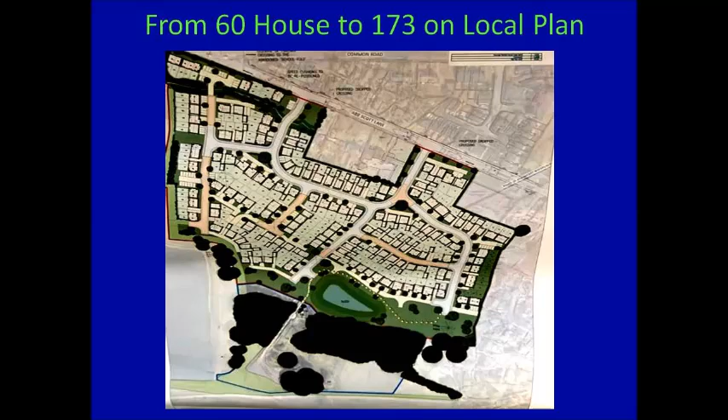Memorialise the objections so that material fact may be scrutinised. To assist local people by describing the working of the planning system. To provide knowledge on how to make an effective planning objection, and in doing so assist in the identification of effective planning policies and valid material concerns on the site, and to guide you to a template that you may wish to use, share, adopt or submit.

We'll try to answer some of the questions raised at the meeting of the 9th of September 2024, which we've appended to the end of the presentation.

In the process of doing so, we'll walk you literally through the planning site, showing you video capture of some of the issues relevant. As the scope of this material is enormous, you may wish to watch this video in two halves. You may stop the video at any time to read any text or map.

Planning can be a tedious process, and we have tried to make the material as interesting as we can and suitable to all levels. So let's get the more dry material out of the way before we move to the issues of flooding and the dam, so bear with us.

So, what makes a good planning objection? It should set out any reasons for extension, such as the absence of any statutory consultee or delay in the response, because you cannot make an objection to an application if it's prejudiced in the absence of information. Having set out a request for extension, most importantly, it should be in two parts.

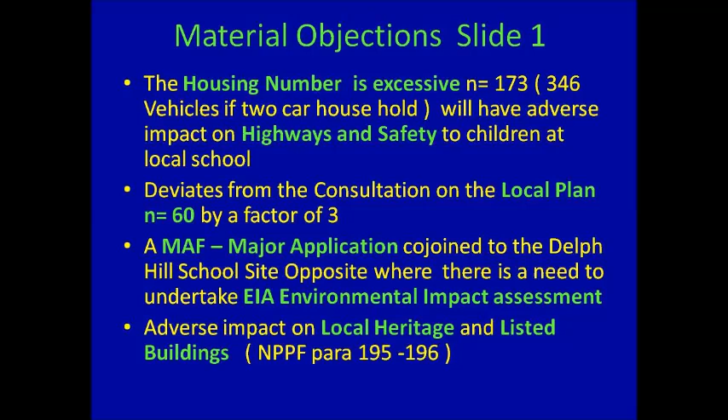We are now going to turn our attention to the major robust issues, beginning with mines, and in particular ground stability to the front of the dam, contamination and mine gas. We will also be looking at flood issues in relation to the linked and connected matter of proximity to the dam...

...and the 2 large raised reservoirs of high capacity, sustainable drainage and local flooding. We'll also identify the HSE zone, placing restrictions on housing numbers due to the dangerous industrial activity, and we'll also go into detail on the template objection BNL, which is biodiversity net loss as a result of the development.

We are now going to look at issues of mines on site, the direction of which is set by the statutory consultee, the Coal Authority. The principal concerns are ground stability, contamination and mine gas. And in particular, ground stability, given the proximity of mines to the frontage of the dam and any permeation of water through the subsoils which might cause instability at a future date.

The fields facing the collecting basin, particularly in the southern proximity, will inevitably have some form of seasonal subterranean seepage across the ground layer, which when considered with the very close proximity of mines is a factor which I cannot see has been taken into consideration, particularly in mines which are grouted and plugged.

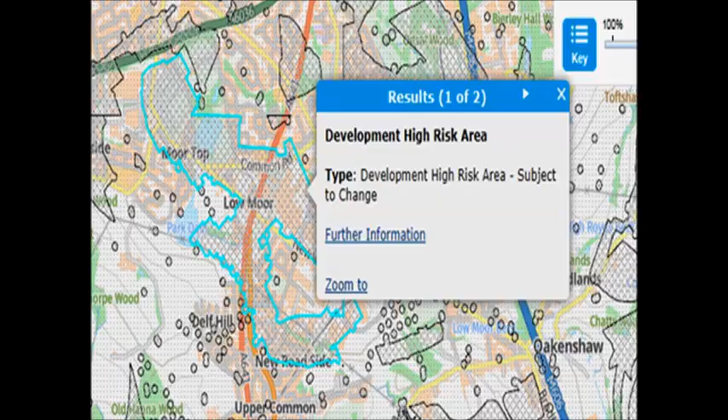So let's have a look at the Coal Authority maps, which many people will have not seen, and you can make your own mind up. The maps aren't at a particularly high resolution, so I've taken the liberty to blow them up a little so they're clear. From these maps we can see that the area is close to or within an area of high risk and unsuitable for development.

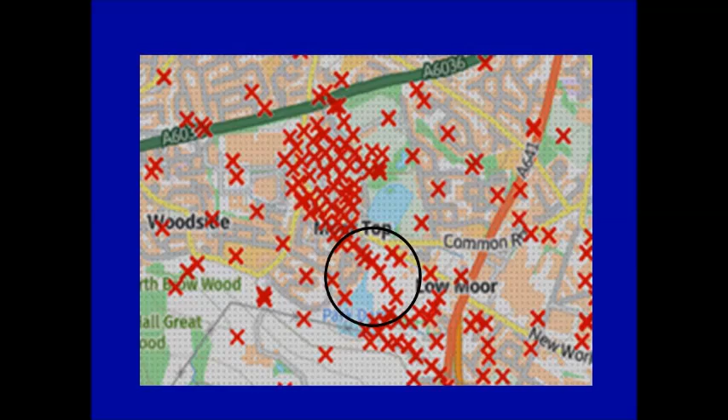We can also see the presence of mine shafts on the site with entry and the potential zone of influence of those shafts on the site. Developers will seek to remediate these mine shafts by grouting or plugging them, and on the issues of mine gas they will put membranes to exclude. However, developers often can't mitigate the unpredictable effects of ground stability.

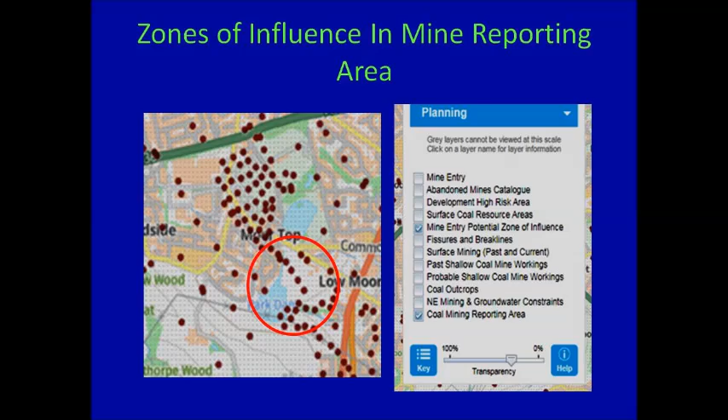We turn now to the required statutory consultee, the Health and Safety Executive, where the site is located within the middle zone of a dangerous industrial manufacturing area, namely Solenis and one other. The comment from the HSE on the Regulation 18 Preferred Sites consultation is to limit the housing number to 40. This number has already been exceeded in the Delph Hill Middle School development on the site opposite.

As per the meeting of the 9th of September 24, we have taken the liberty to contact the HSE to see if these zones of influence have changed as a result of manufacturing. Likewise, it is unclear how the developer will justify 173N houses when the preferred site consultation limited or restricted the numbers to 40.

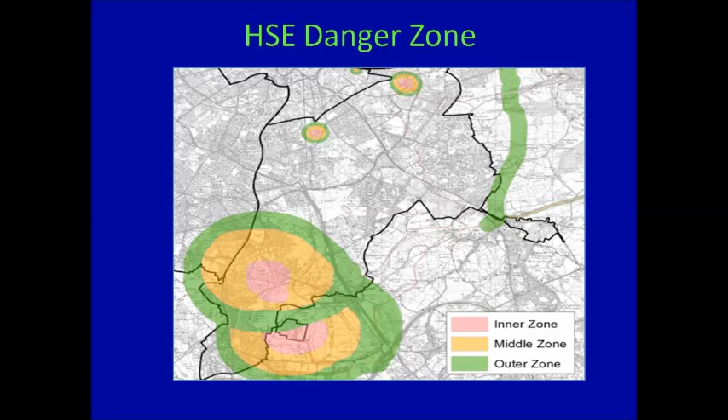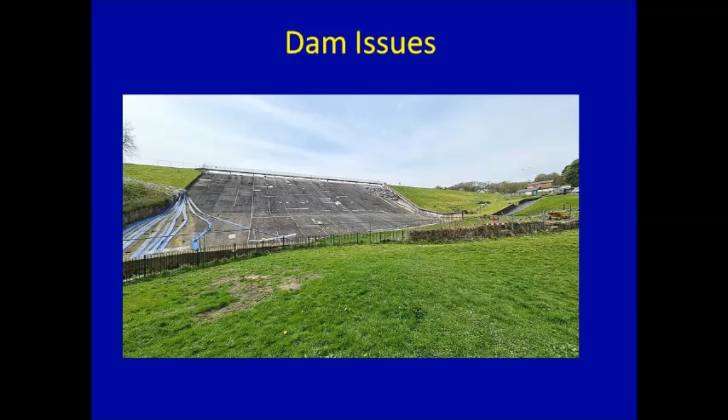We are now going to take an in-depth view to the maintenance of Park Dam and its watercourses, as it bounds the site on all four sides. We examine it in the context of flooding, drainage, and the implications of riparian rights on the watercourses located on it. We believe we have done this with due diligence in the light of the Toddbrook Dam incident.

Where we make reference to the dam and its watercourses, we do so in respect of the compass at the midpoint on the development site. So let's start at the beginning, where the water comes in.

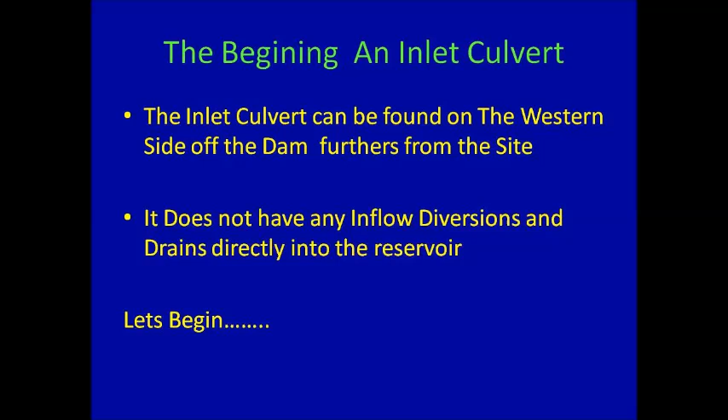Okay, so it's 13th Friday in September and we're back at the Park Dam. Today we're going to have a little look at the inlet, which is just down there. Hopefully the camera doesn't go into the water. So we just put the camera down. You can see we're actually directly looking into the inlet that feeds Park Dam.

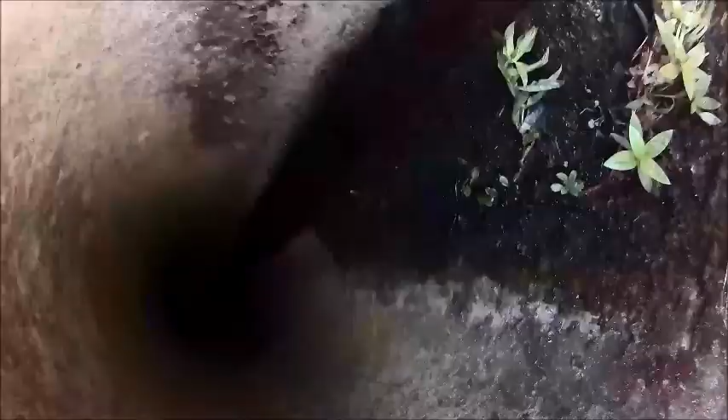There we go, bird's eye view. You can even hear the echo. So that culvert runs all the way over to Brow Woods, just at the side of Fenwick Drive, and this tops up and fills the dam. There is no inlet diversion should you want to stop it coming in here.

As we look up in the distance, we're going to go to the other side of the dam to look at the two outlet channels, the one in the south, which is on the Delph Hill side, and the one in the north, which is on the Cambria Bar side, and we'll be looking at the outflow. So the purpose of the visit today is to look at the inflow into the dam, the outflow, the integrity of the dam wall, and then to go forward and look at the potential breach point in the corner where the north part of the reservoir turns into a channel mouth.

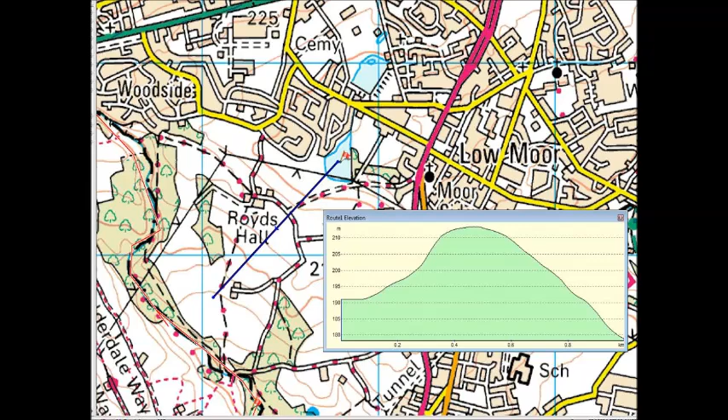Park Dam can be seen here on the 1854 Ordnance Survey map. Park Dam is an impounding dam, meaning it catches water and drainage from the surrounding hill slope hydrology from the 225 contour line. Here on the 1897 Moor map, we can get a brief insight into how the dam was terraced and constructed as a collecting basin.

As we move across the reservoir to the side closest to the development site at Abb Scott Lane, we can immediately see it has two channels. A channel to the north, which is a runoff channel, and a channel to the south, which is the dam spillway channel moving through Park Bottom Wood. Before we commence our journey around the watercourses, that being very important in the context of the Moor Act and the restrictions on the development site, we take a very close look at the anatomy of the dam.

Park dam is an impounding dam, meaning it collects runoff and drainage from the surrounding hill slopes, as opposed to a non-impounding dam, which is normally filled with pumps and other means.

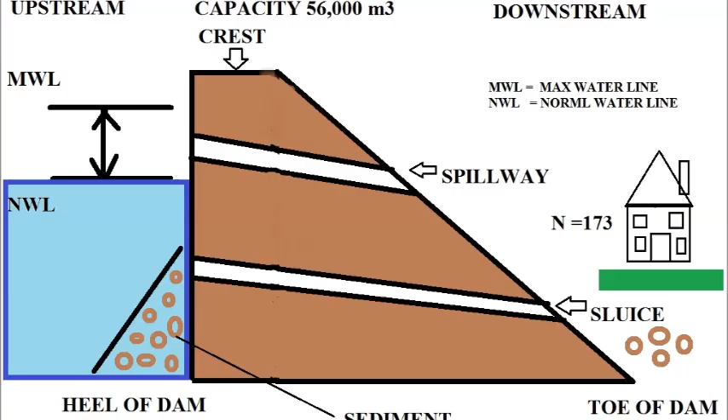As a community, we cannot overemphasize the immense value that the reservoir and open space in its current form brings to our area and community, and reflect the dam's role in preventing the Allied Colloids fire in 1992, where the links are in description, and which we also reflect in our health and safety zone objection on proximity. Perhaps the moral of the tale is to leave well alone.

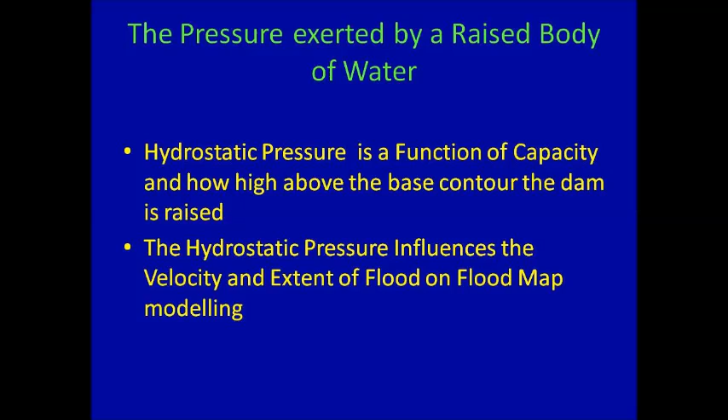Is coming out on the base. We can see that's influenced by the hydrostatic pressure. If you upturn it, you can see how different the water is as it comes out.

And obviously, as you raise it higher, the jet will reach further. So we turn it back up the other way, and we can see clearly as the hydrostatic pressure goes off towards the hull, the amount of water

at its distance reduces. The main purpose of this demonstration is to demonstrate what hydrostatic pressure is. The hydrostatic pressure, the forces on this wall, are very much down to the capacity of the dam, and the current estimated capacity of Park Dam is in and around the 56,000 cubic metres.

So that wasn't a very good demonstration, but I'm simply illustrating that on this dam there is a tremendous amount of force on the walls, and we have to ensure that no overspill occurs.

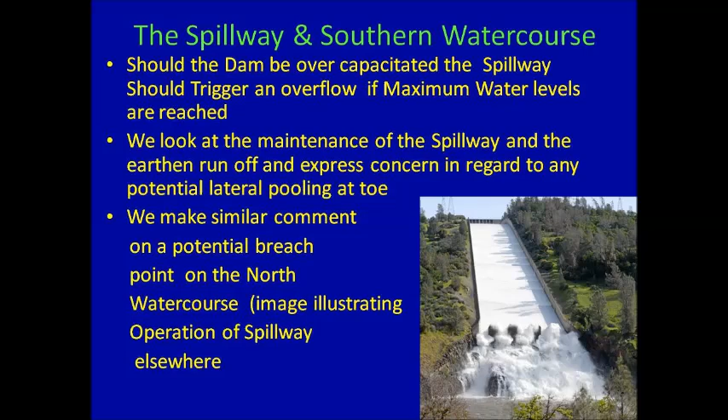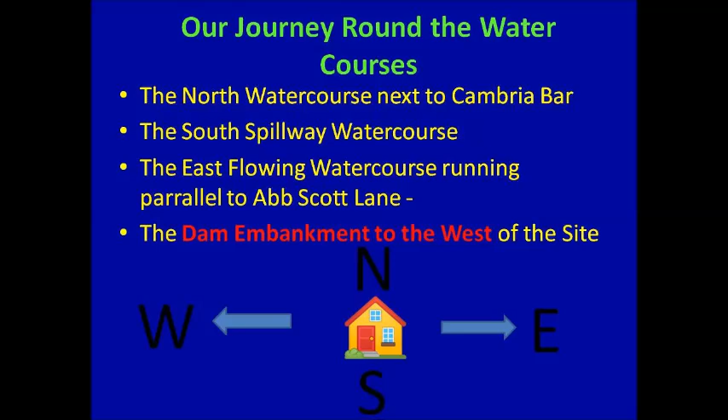My lay assessment and observations are that the spillway modification never adjoined the watercourse reaching the mineral track bridge, as it was always intended that that watercourse was for the use of sluice activity. Therefore, the potential for the spillway section to pool and undercut the earthen toe exists and could be a concern, given the object of a spillway is to remove water away from the dam.

Okay, so we've just come the other side of the spillway channel, the earth channel out. You can see that we should be able to follow it. Obviously with vegetation and trees, we should be able to follow it over to the centre of the wood there.

But I am quite concerned that if we look at the discrete length of boundary to the watercourse, particularly on the earth embankment, if the spillway was pooling and diverting onto the toe of the dam directly in front of me, then it could undercut and undermine the toe of the dam, which is not the most ideal thing.

If you start to remove the body of earth on that toe back towards the crest, it's clearly going to take away some stability of the overall structure. So lack of a discrete channel going all the way along the spillway may not be critical, but it's important to get it right and important to maintain it.